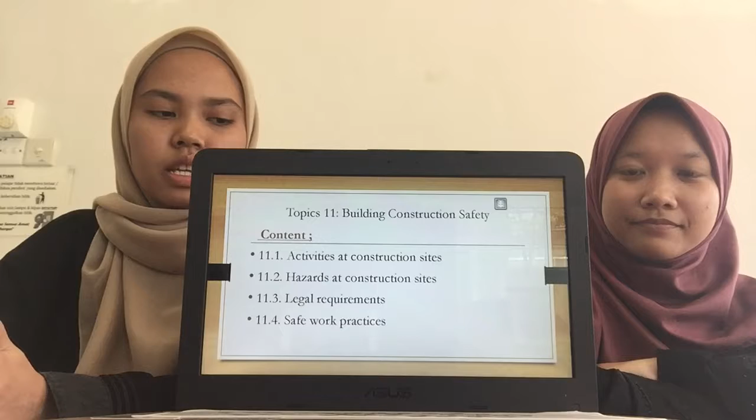There are 4 subtopics in building construction safety. The first one is activity at construction site. The second one is hazard at construction site. The third is legal requirement, and the last one is safe work practice.

Introduction to building construction safety. There are a few questions that we want to explain in this presentation.

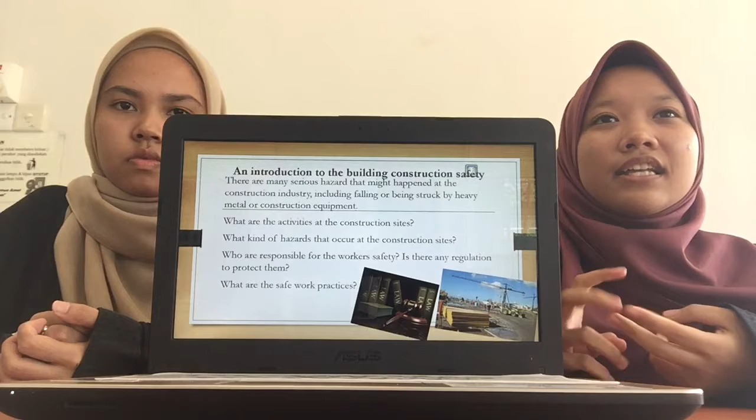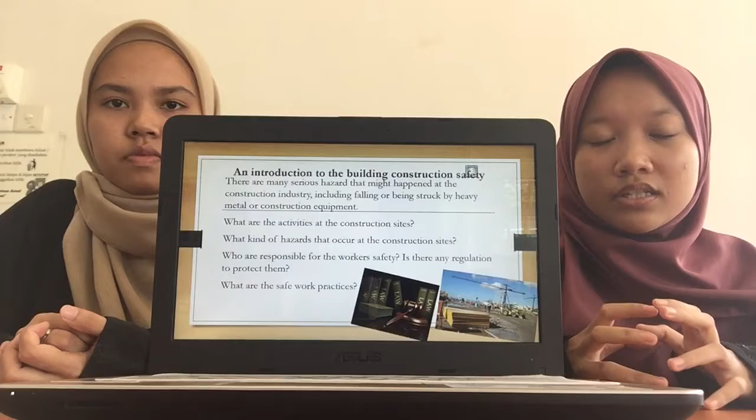The first one is what is the activities at the construction site, and the next one is what is the hazard that happen at the construction site, and the third one is the legal requirement that will protect the workers if a hazard happens at the construction. The last one is what is the safe work practice.

I'm going to explain about the first subtopic, which is activities at construction site. The first activity is site clearing, which is the first step before construction. A building, they must clear the site.

The second one is bore well digging, and the third one is footing or pillar base, and the fourth one is plinth beam, and next one is electric work such as all these electrical setups, and the next one is build bulk foundation, and the last one is roofing.

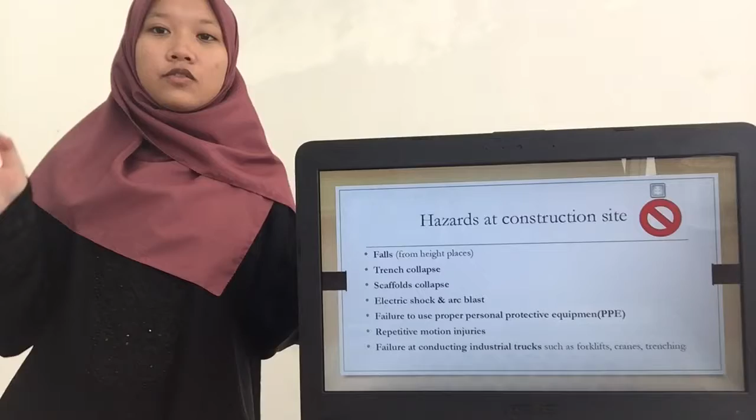The next subtopic is hazards that happen at a construction site. The first one is falls from a high place.

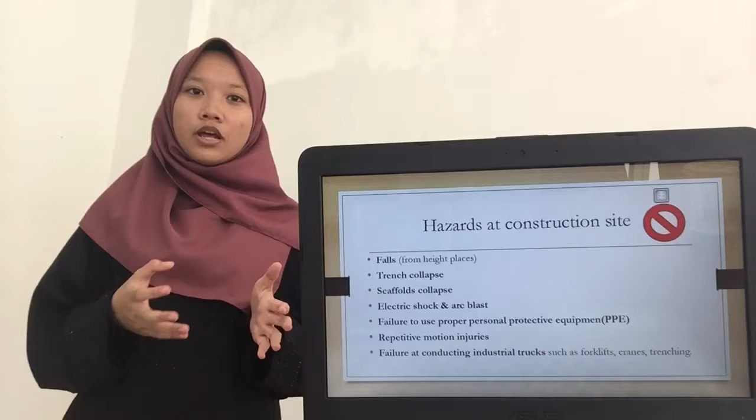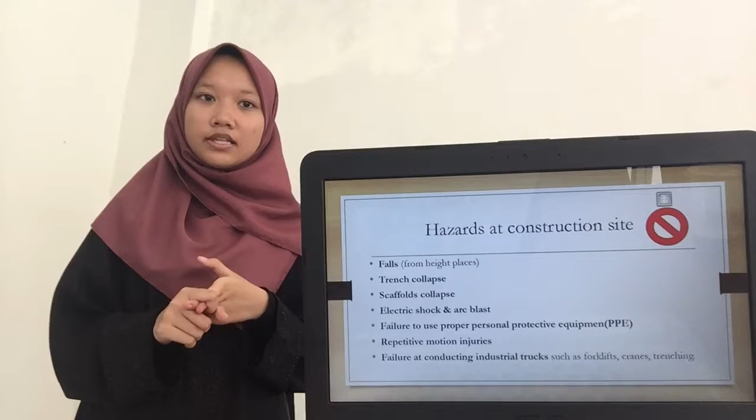This is the most common hazard that happens to workers at a construction site. Each year falls consistently account for the greatest number of fatalities in the construction industry. A number of factors are often involved in falls, including unstable working surface, misuse or failure to use protection equipment, and human error, also known as carelessness.

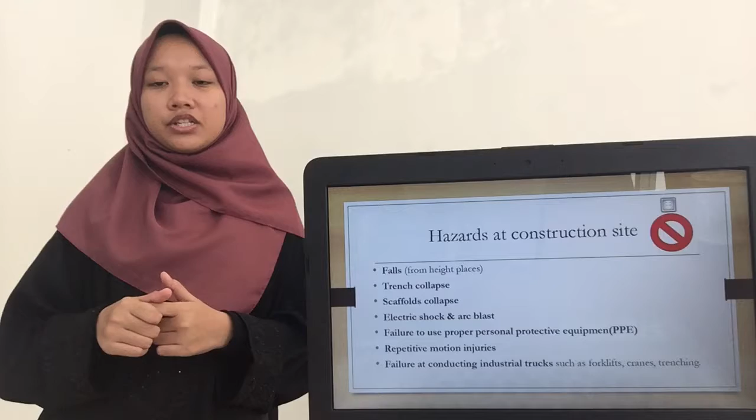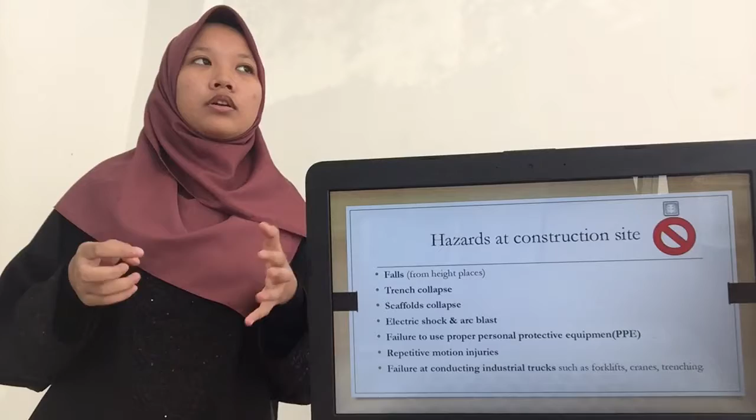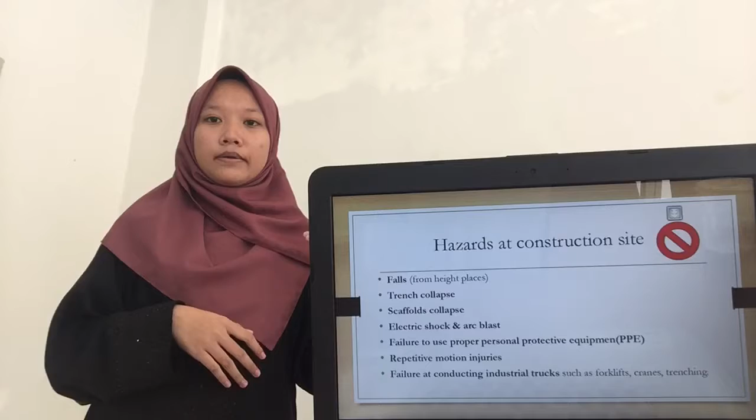So basically, there's a lot of reasons for falls that happen at a construction site, also maybe because of a slippery floor. So in this case, workers should be more focused in their work and be more careful when they are using the equipment, so that nothing like this will happen.

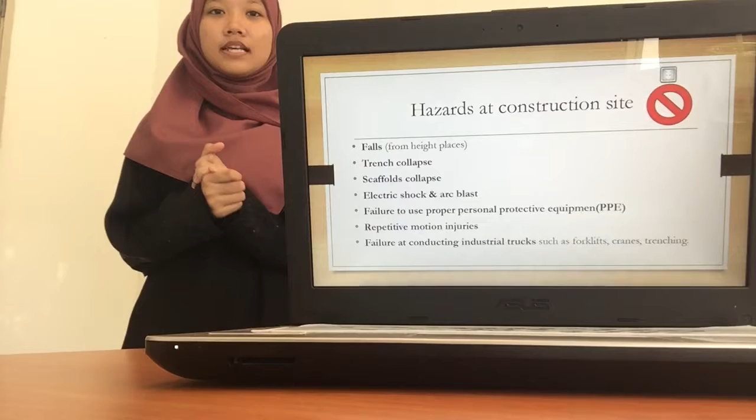When scaffoldings are not erected or used properly, falls can happen. Fall hazards can occur to the workers. About 2.3 million workers frequently work on scaffolds, so it is important for them to be careful when they are scaffolding.

And the next one is electric shock and arc blast. Every building has an electric system or circuit. So when they are going to conduct electrical equipment or electrical tools, they should maintain the electrical tools in safe condition and check regularly for defects, and take out of service if a defect is found. So it will be more safe for them to conduct an electrical system.

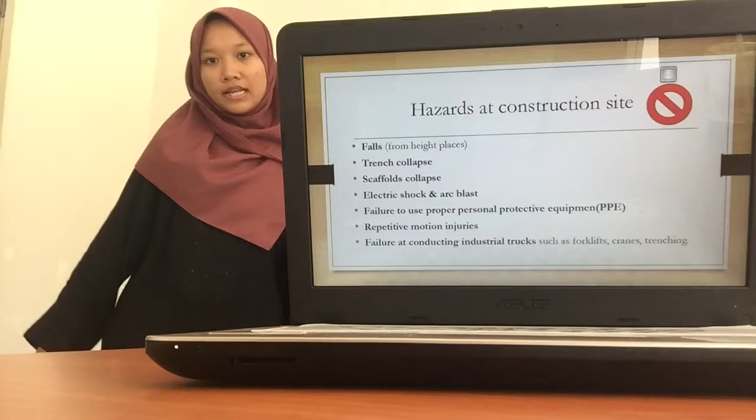The next one is failure to use proper personal protective equipment, also known as PPE. There are examples of PPE such as eye and face protection, foot protection, hand protection, and head protection. As an example, if a worker didn't wear a face mask or face protection, their respiratory system will be exposed to dust, or the particles, the molecules that are at the construction sites.

So it will affect their health. It might not happen in a day, but as time passes by, they will only realize that it affects their body. So it's a long term effect.

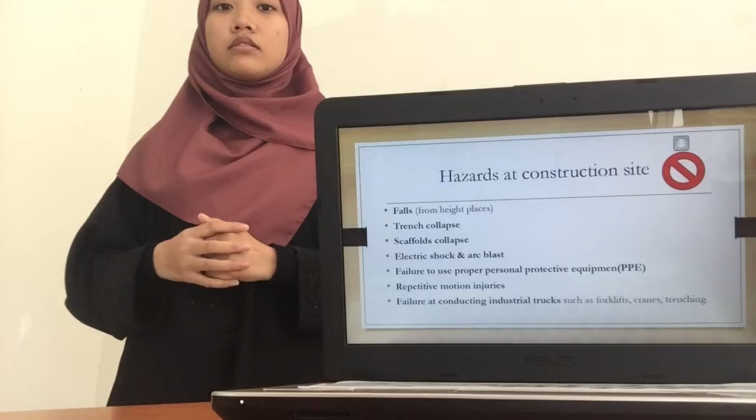The next one is repetitive motion injuries, and last but not least, failure in conducting industrial trucks such as forklifts, cranes, and trenching. So as workers, we should know the proper way to use or conduct industrial trucks or industrial equipment in order to avoid hazards like these, and they must have someone who knows about the equipment better to tell them.

It shall be the duty of the employer and every self-employed person to conduct his undertaking in such a manner as to ensure, so far as is practicable, that he and other persons, not being his employees, who may be affected thereby are not exposed to risk to their safety or health.

The second legal requirement in building construction safety is subject to Section 17(2) under the Occupational Safety and Health Act 1994. It shall be the duty of the employer and every self-employed person, in the prescribed circumstance and in the prescribed manner, to give to persons not being his employees who may be affected by the manner in which he conducts his undertaking the prescribed information on such aspects of the manner in which he conducts his undertaking as might affect their safety.

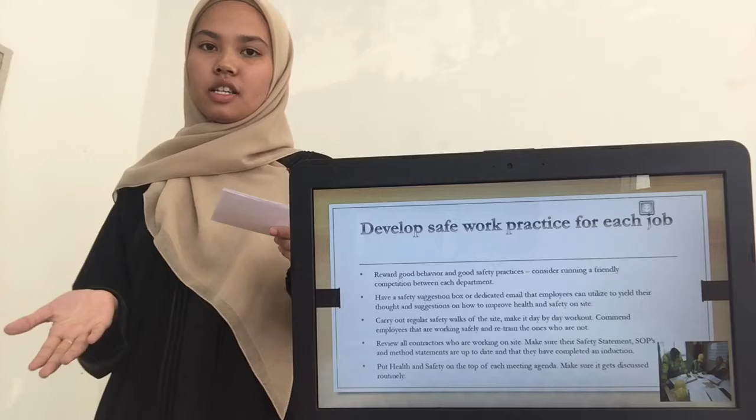We can also have a suggestion box or dedicated email that employees can use to share their thoughts and suggestions on how to improve health and safety on site. Maybe one of the workers wants to give their suggestion or ideas to improve health and safety on site. They can put their suggestion in the box, or just email the company to give their opinion.

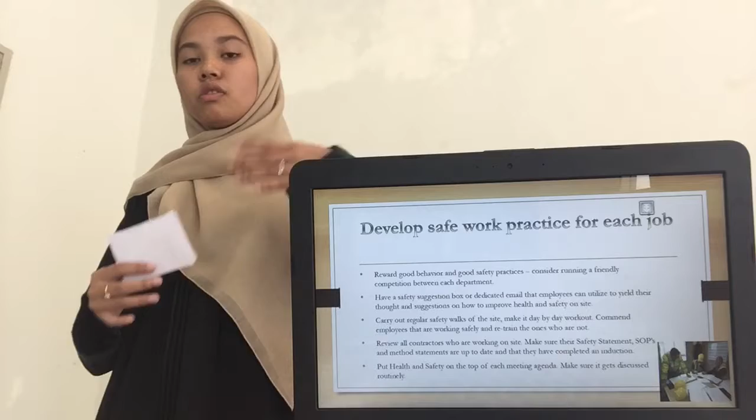We must also carry out regular safety walks on site, day by day, to commend employees who are working safely and retrain the ones who are not. So we make regular safety walks, see which workers follow the safe work practice and which do not, and for those who don't, we must retrain them.

We must review all contractors working on site, making sure their safety statements, SOPs, and method statements are up to date and that they have completed an induction. So we review all contractors at the site to make sure they follow the SOPs, are up to date, and have completed the induction.

And the last point is to put health and safety at the top of each meeting agenda, making sure it gets discussed routinely. So when the company has a meeting, this topic should be at the top of the agenda, and we must discuss it regularly to make sure our safe work practice develops for each job.

The second one is about performing hazard analysis. There are five parts: involve your employees, review your accident history, conduct a preliminary job review, list/rank/set priorities for hazardous jobs, and outline the steps or tasks. Involving your employees is very important in the hazard analysis process because they have a special understanding of the job, and this knowledge is invaluable for finding hazards.